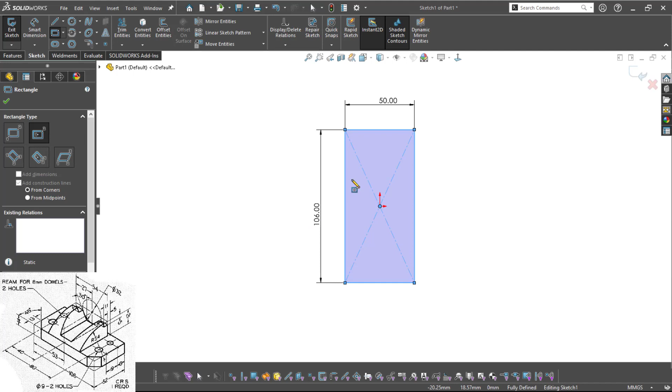I need to reverse these things. Always try to sketch your model in such a way that the orientation and isometric view should be the same as you're looking in the sketch. Apply the chamfers at these corners, you can even change it to angle and distance. This is 13, and these two corners.

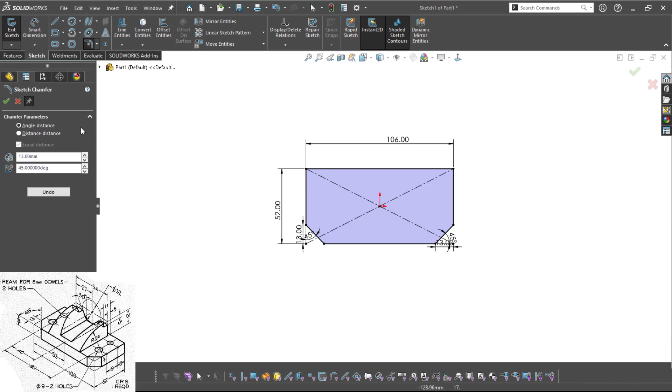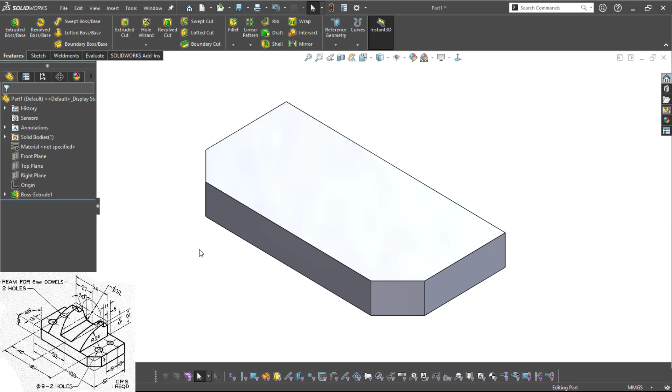Next I need to deal with the top portion, as you could see. So I'll just use the top face, and on this I'll sketch this portion. I'll use the center rectangle again and define the dimension, as you could see it is 54.

The top edges have been referred, so we don't need to define the horizontal distance there. We can use the Instant3D and drag it up to 21 as a shortcut. Once this is done, refer the face and just draw this curvature.

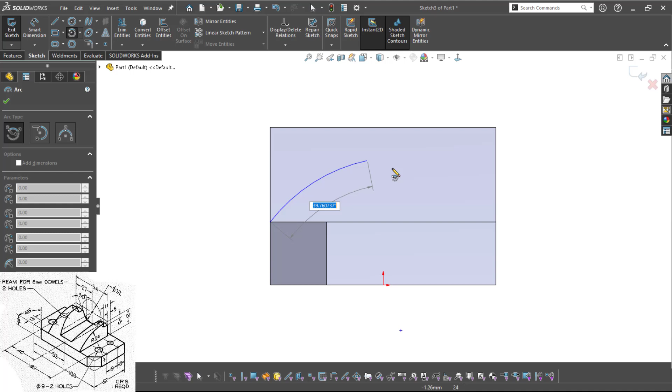I just want to remove the material, right? You can use the center arc. Sometimes it won't work, you need to start from left to right, so then only it will be fine like this. I can drag it, but if I place it like this, it won't work. Let me just try, the radius is 54.

Now it is fully defined, but it cannot assign the tangency. What I can do here is, by just looking at it, it shows it should be tangent. So in this case I'll just remove this coincident relation, and now I'll simply keep it like this and define the tangency relation.

If I define the tangency, I need an extra extended line to just deal with this. So you can use the line tool and draw the required line like this. You can trim the portion which you don't want. This needs to be horizontal, and now the open profile is there.

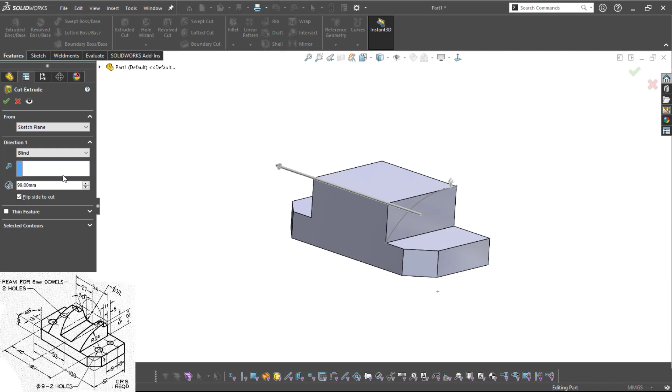You can even use this one to just remove the material. The advanced option in SolidWorks, you can just flip the direction and define the dimension. Choose open profile and cut it. I'll just reduce the size to 70, okay fine, green check.

This you can do it in SolidWorks, it's very easy to deal with this kind of structures, and using the open profiles you can remove the extra material.

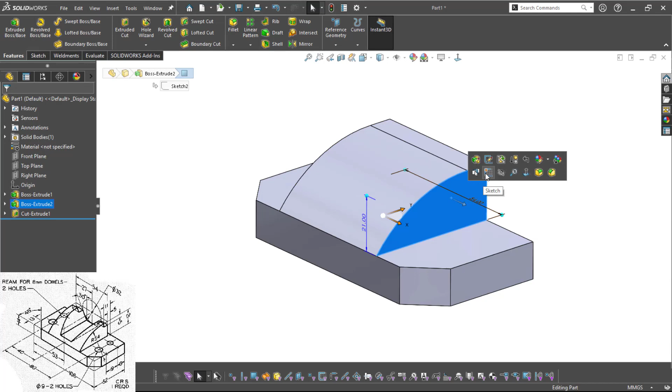And yeah, I need this structure, so you can trim this extra. Now you can give the dimension, that should be 5, this also should be 5. Okay, this is, yeah, 5. From here to here it is 11. As you could see, the sketch is fully defined.

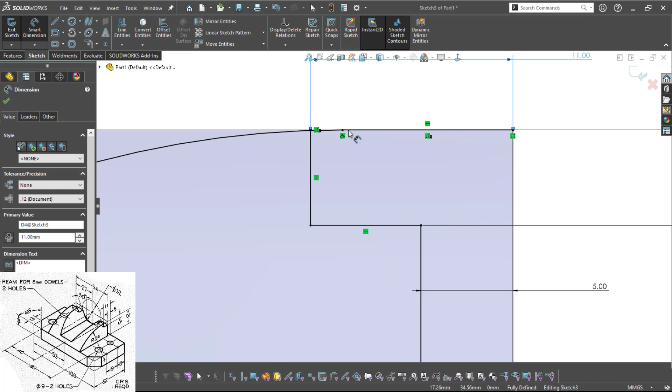I need to remove these extra steps, which are not needed, the small things and this line. Dimension gone, so what you can do is reassign the dimension with respect to the reference edge.

Now you can try it, so it won't work due to the complex geometry.

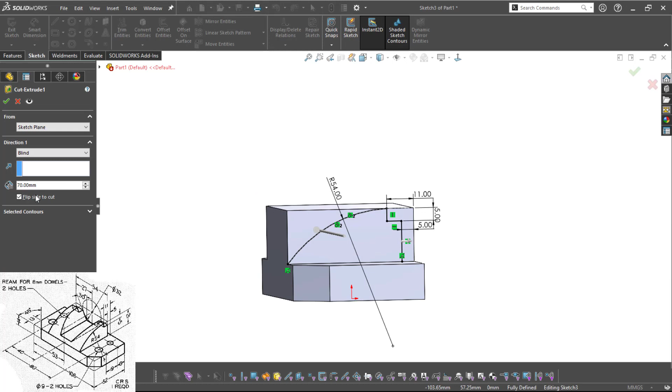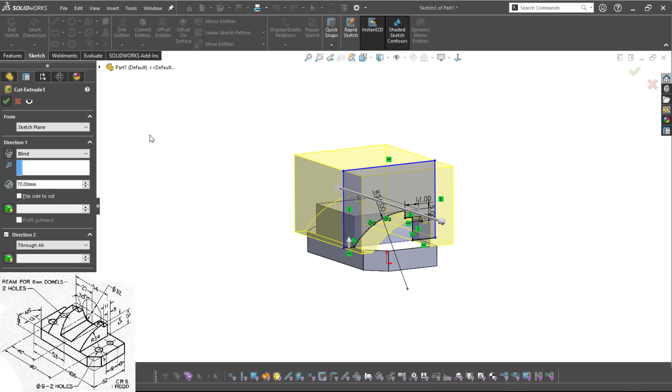So this time I'll use the close sketch. You can simply edit this and close it from the backwards like this. The outside material we don't want anyway, you can do that, so edit the feature and just reverse, flip the cut side. Okay, this is fine.

On the front piece, I'll draw this one. As you could see, the circle is drawn at the center, and it is vertical to the origin, it should not move. All the dimensions are given, the diameter of the circle is 32, and this and this should be tangent. I'll take it at the moment because I can't see the dimension he has mentioned.

Next thing I need to draw the tangent line, so I'll refer this edge and draw a line, making it tangent here. Next I need to create this shape, so I'll specify the angle. This is an advanced technique - select the line and point and define the angle. It is 30.

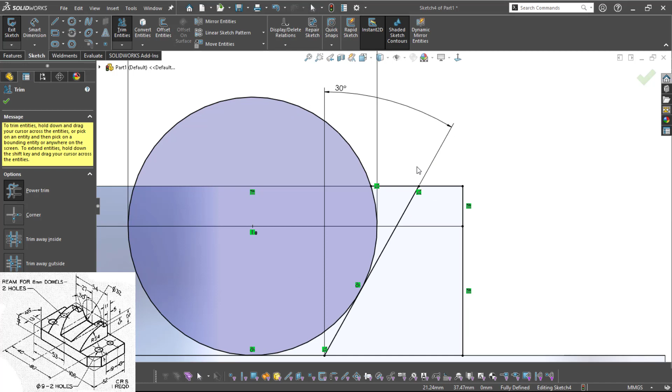Next I need to create the closed sketch here, so I'll use the convert entities tool to save time. Oh, I don't need these. I need a center line to trim the entire circle, so I'll refer it as a construction line.

Mirror entities to mirror these whole things, mirrored about this axis. This is fine. So now here I need a line.

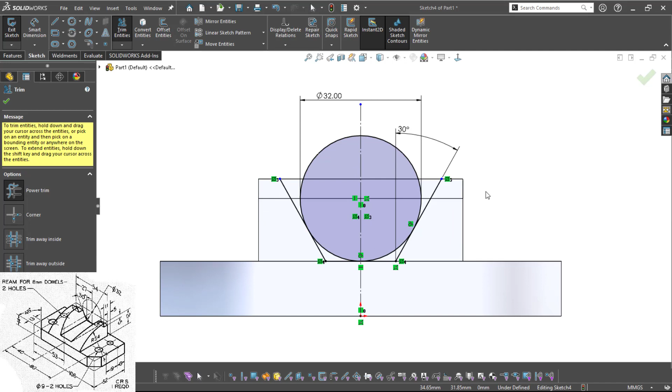I need to close this. I think this extra outside stuff is not needed - only the inside material we need to remove. This is not needed, remove this and the circle, and this. Yeah, I need to have this.

So control Z, and convert this for construction, so it will be referred as construction only. I'll close the sketch using the line tool, now to get the collinear relation done.

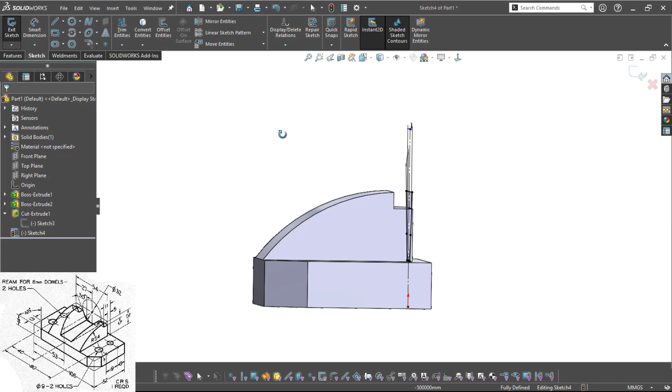Exit the workbench and extrude it - that is cut extrude. You can use the Instant3D, drag it, use the quick access, and cut.

The thing is, as you could see, there is a slight distance I need to give from the bottom edge to the tangency of the circle. To deal with this, from the sketch I'm not able to analyze the dimension from the tangent edge to the bottom rectangular block.

What I'll do is simply analyze it as 5 mm at the moment, and let's see how it's going to help us deal with this particular scenario.

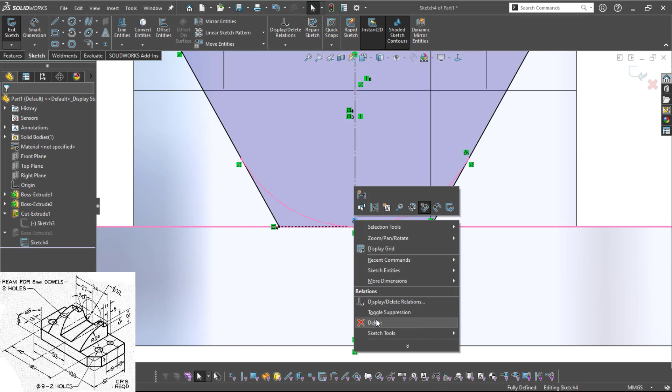So what you can do is simply edit this particular sketch. Here I need to move this one up, so I don't want to delete everything. What I can do is remove the tangents, and this I can't move. I can remove this corner coincident relation.

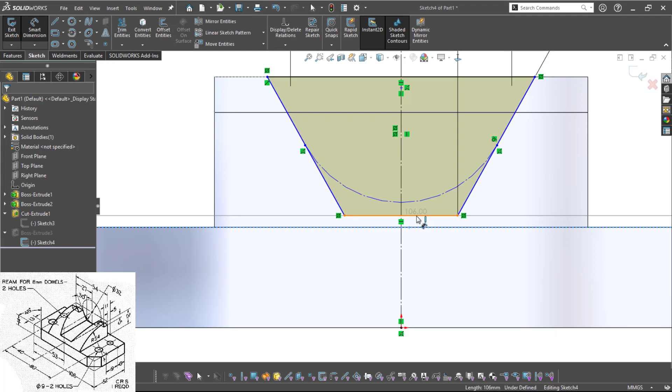This one, yeah, if I remove this I can move it up. Now from here to here it should be 5 for me, and this circle should be tangent to fully define the sketch - this line and this curve tangent. Yeah, this is fine, this looks pretty nice and it is appropriate. I believe there might be a dimension lag.

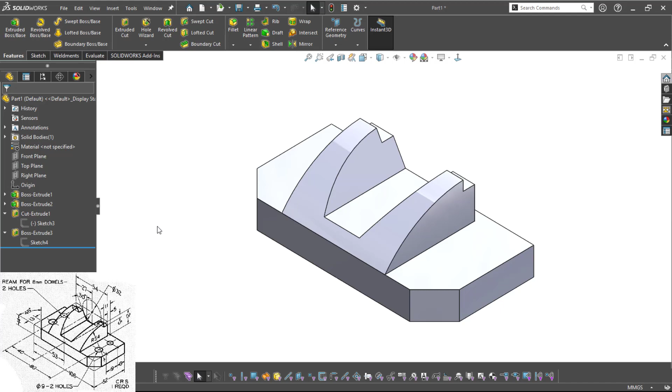Okay, the next step is to just add these holes. You can use the extruded cut to deal with this, so I'll refer the top face as a reference and simply draw the sketch.

The diameter for the holes is one is 8 and one is 9. I'll refer the center axis as construction, and I'll use the dynamic mirror, so whatever I draw on one side will automatically reflect to the other side. So it should be 8, and this is to be 9.

I'll just give the dimension, so from here to here it is 80. One side is 40, so as it is symmetry it might take - let's see.

So this is vertical, so it should not move. So from this point to this edge it is 13. Yeah, from this point to this point it is 19.

Yeah, done. So I use the Instant3D tool and simply do the same thing, you can use the cut extrude. Yep, that's all about this here in SolidWorks. So what I'll do is I'll use Catia now.

Mechanical, from there select the part and you can name it here as well - locating finger, the part name. Just click on OK to access the workbench.

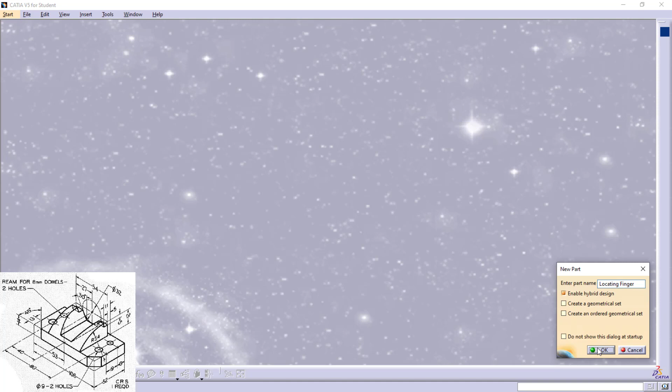Now you can use the standard planes. I need the top plane because I need to draw the block at the bottom, so I need to select the sketch. Once you click on sketch you can access the rectangles, the profile - if you use the profile you can even draw it like this.

So the snap is active, so you can just turn it off by using the snap option. Let me just showcase the same thing. I'll draw this - yeah, instead of the profile, it is taking too much time, I'll simply draw the rectangle.

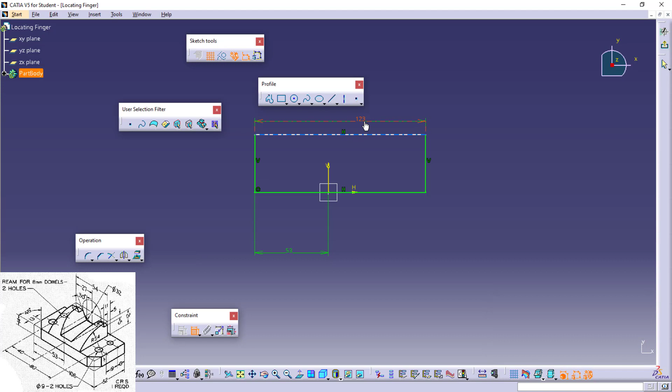I'll define the half distance, it is 106 by 2. Can mention the same thing - sorry, straight 106 by 2. This should be 106 total, and this distance should be 53 as mentioned.

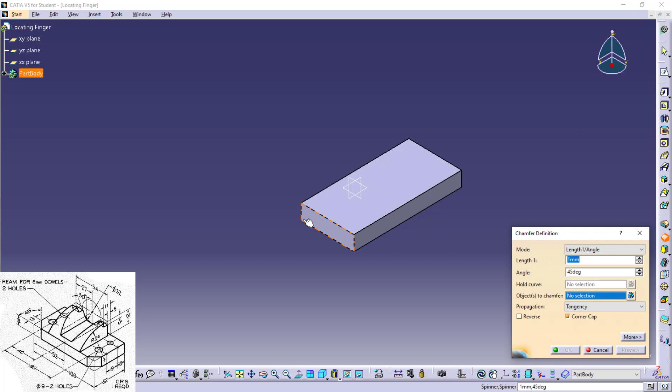Okay, once you're done with this, simply extrude it up to 14 mm. Once that is done, you can align it to isometric view. The flat chamfer I need here, this edge 45 is already taken, so length and angle, 13 the distance. You can use the preview as you could see and just simply click on OK.

So next thing I need to just create the top portion. Just select the face and drag it down.

On this, you can use the rectangle first. You can't refer the edges here, so I'll turn off the snapping.

So this is the kind of rectangle. What I'll do is I'll simply use this one and this one, hold the control and use the constraints, and define it as coincident.

Now dimension, so you can activate the constraint that is already defined. This edge to this edge, it is 54.

Still it is undefined. I need to define the center distance. So what I'll do is... cannot find the constraint here. No midpoint axis. Can't do it like this.

So what I'll do is I'll use the dimension only. It is 54 by 2, right? Can do that. From here to here it is 54 by 2. The dimension.

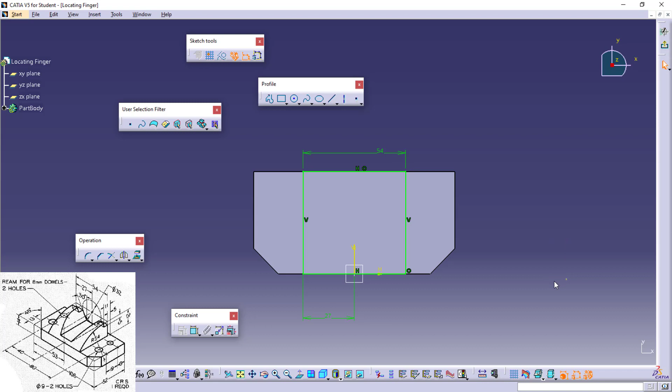So I need to extrude it up to 21. You can just drag the tools and customize it wherever you want. So I can do it. Hold the shift to just align it properly like this. Extrude it to 21.

This is done. Select this face, sketch. Can even drag that sketch and place it here. Middle cursor button drag to move.

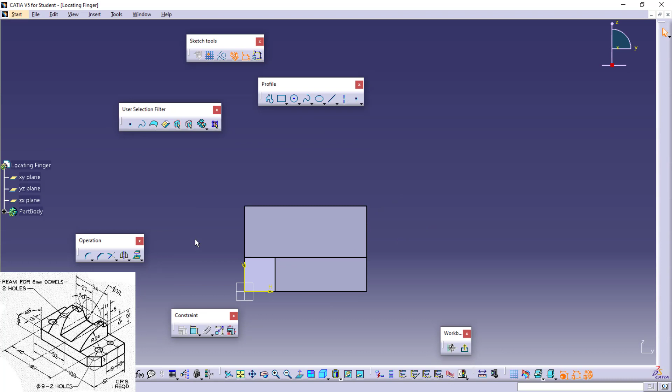Now I need to draw the same thing. You can use the center arc. Draw it however you want.

Now this point and this edge should be coincident. Activate this tool and make it coincident. There are many ways to deal with this, some shortcuts I'll explain later. So point and edge can't be... yeah, it is possible coincident. Click on it.

Now I need to define the dimension. The tangency is fine. Anyway, I need to define that.

First, I'll draw the rough sketch of this reference, like this it is. I'll draw a complete profile like this.

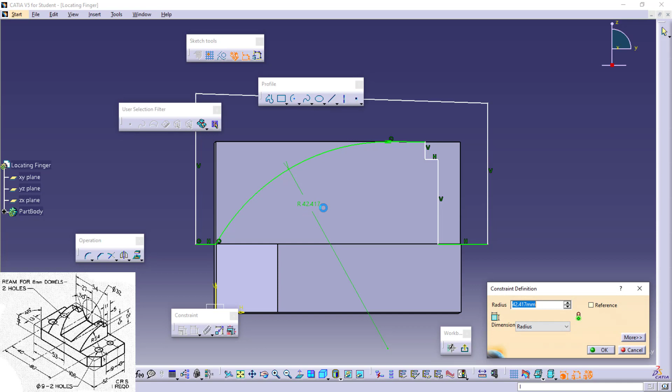Our dimension, this should be, as I said, it is 3, 4, 5, and this is 5, 11.

But the thing is, as you could see, I need to trim this. Can't drag it because due to this coincident relation, I'll just delete this. Again, drag it now this side. But this line is not needed.

What I can do is, you can drag it like this, delete this, and now you can use the trim. Erase tool is there. Just select that, remove it. This I don't want, and this, yeah.

It is still undefined. So anyway, the dimension is there to point to that line. What I can do is use that dimension point and the edge coincident. Okay, still it is undefined. So I'll define the dimension again. Let's see.

So use this line, from here to here it is 5. Okay, this dimension is not needed.

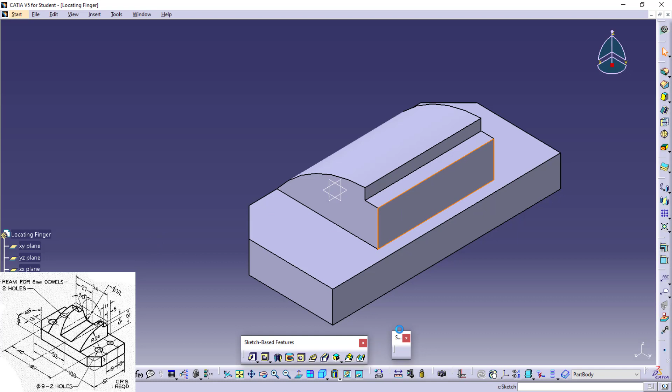This time I shouldn't make that mistake, so it shouldn't be tangent to the bottom edge, right? It should be at a certain gap. I'll keep it like this. Instead of using the line, you can use the profile.

Here it should be like this. From here to here it is 5.

Right, and next thing is, yeah, these two should be coincident. Just select this edge and define coincident. Shortcut it is. By using the dimension tool also, I can do the same thing.

So I need to assign the dimension here. I'll use this vertical axis as a reference and it is 30.

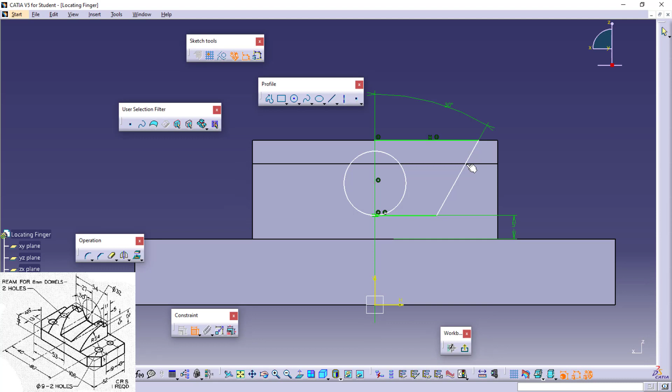This and this should be tangent. Select these two, right click and tangent. Fine. Still it is undefined.

The diameter I need to define, right? It is 32. Here, this is fully defined. Iso-constrained it is in CATIA.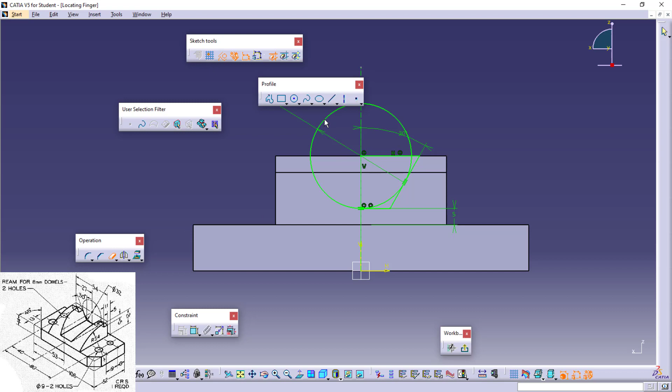So I need a reference construction line to mirror it. I can even refer the vertical line. I'll trim. Okay, for trimming I need it. Yeah, so this is fine.

Now I'll select this line and I'll simply click on this construction to turn it for construction geometry. Select all, use the mirror tool, so you can see all the tools are available. So I need the mirror, select it and select the axis. This is done.

Simply use the pocket tool here and preview. Fine. Yep, finally I need to create the two holes on this face.

Simply select the face and sketch on it. Same thing, the front one should be of 8 mm and the backward hole should be of 9 mm.

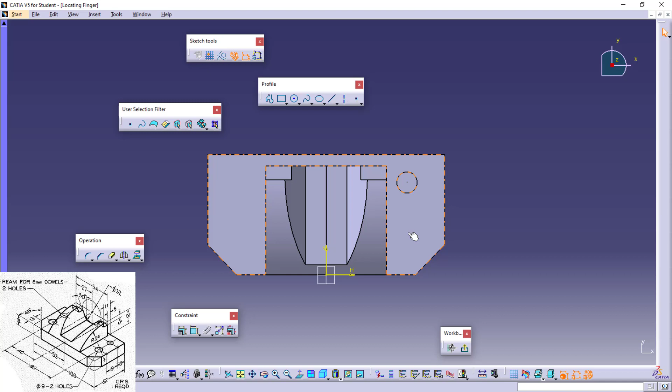You need to double click any of the tools to reuse it multiple times. A single click will help you to use it only one time. Double click will help you to use it multiple times, like this.

It is still active. So this dimension should be 19. As I said, from here to here it is 13, and from the origin it is 40. Total is 80, right? No, 53 is not the case. Let me see. Yeah, it is 40.

Diameter I need to define. It is 8, there should be 9. But still it is okay. It is moving.

You can't use vertical, so there is no option if I make it. So what I'll do is I'll simply draw a line from here to here. I'll make that line vertical, using the constraint definition vertical. Can make it construction now. Yeah, this is done.

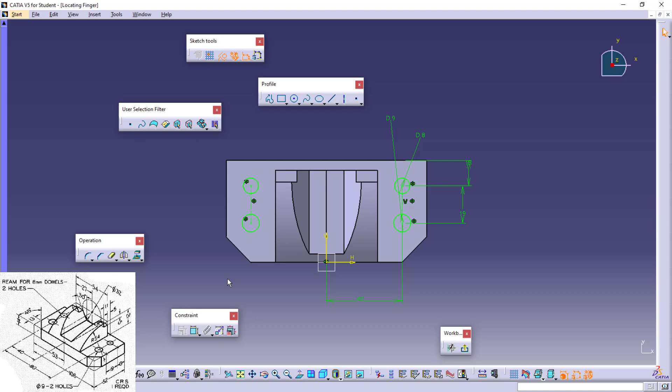Mirror it with the vertical axis. Exit the workbench and use the pocket tool to just remove the material. Preview and okay. Yep, this is on Catia.

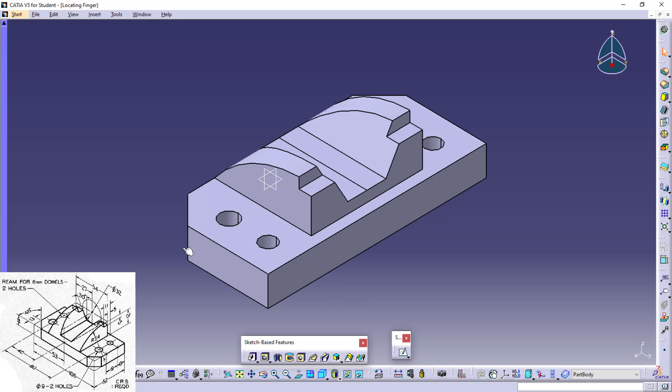Now we'll switch to another software. I'll use Unigraphics now. Okay, NX CAD, so here I'll deal with the model.

So you could see, depending upon the workbench, you have multiple options. I'll use the model and the part. Units as millimeters.

Now you can use the sketch and select the planes. Okay, I need the XY plane. It is Z downwards, no issues. Here the plane selection and orientation is a bit difficult, no issues for that. Okay, you can just simply right click, hold and drag to make it normal to view. Remember that.

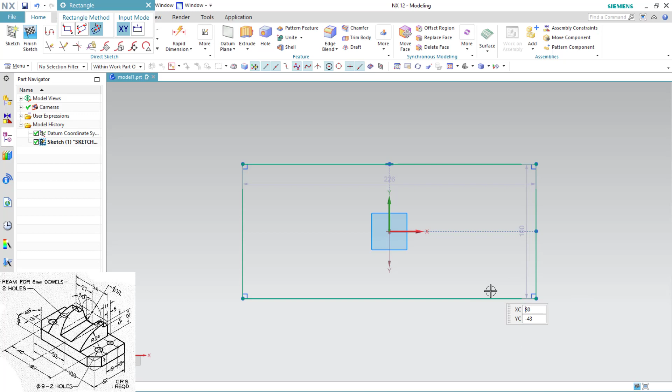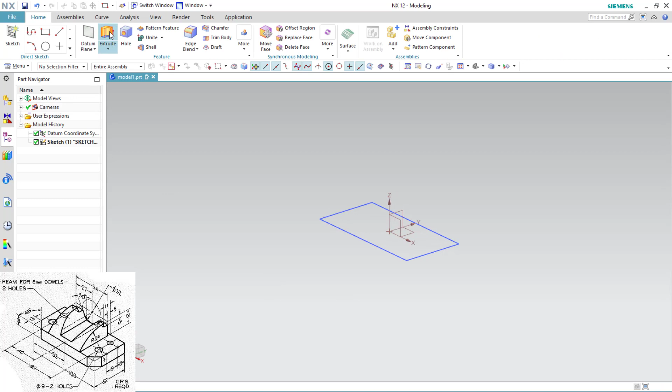Done. Can finish this and extrude it, just select the sketch. Here it is inferred, okay, I need to define the value. It is 14. As you could see, there is no reverse option in this, so I just need to define the minus value. So what I'll do is simply enter minus 14 here to reverse the direction.

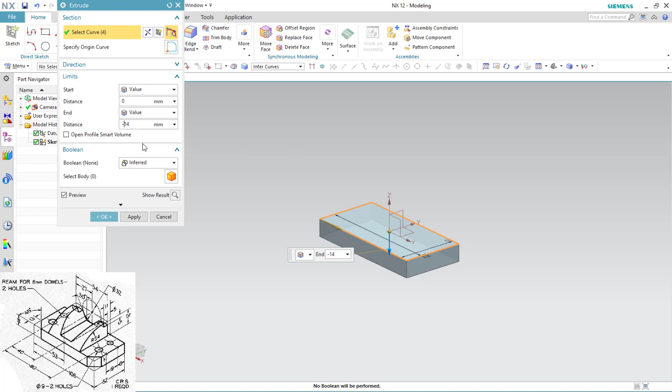This is fine, green check. Okay, now I need to select the plane to sketch it. Before that, the chamfer 13 and angle I need to define, so it is symmetry here. I need to change it to opposite angle, right? Done, yeah.

Now I need to sketch on the top face, so here it is quite difficult. Just selecting the face and sketch will not help you work on the workbench. You need to define a certain point, origin and a plane here, so it is quite difficult in this. So what you can do is refer the center point and the origin. Click on OK, this only you can do it, or else automatically it will snap.

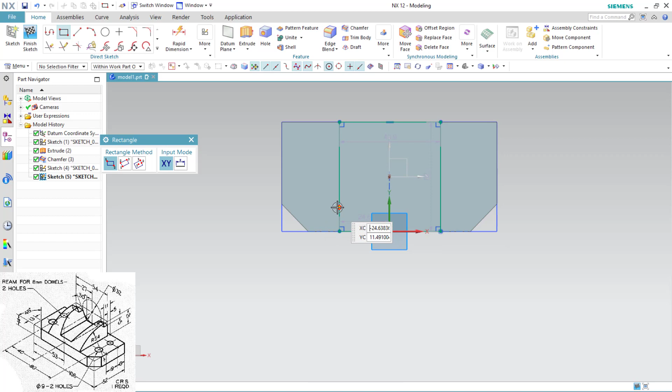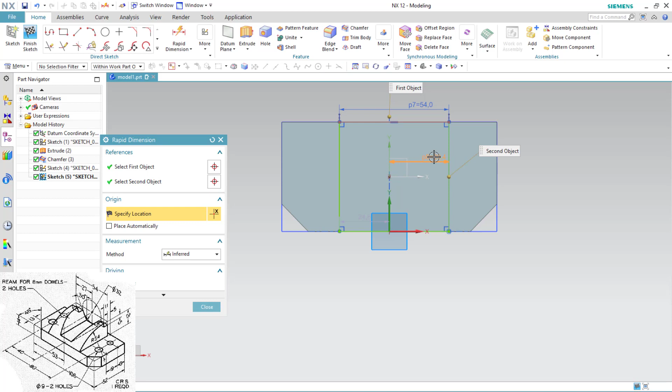I need the corner rectangle, like this. Now dimensions are already defined. Here continuous auto dimension is active, you can just turn it off whenever you are trying to deal with this. Okay, the rapid dimension, so this dimension should be 54. Yep, so this is okay. So from here to here it is 54 by 2. Can enter the values only because we are weak in maths.

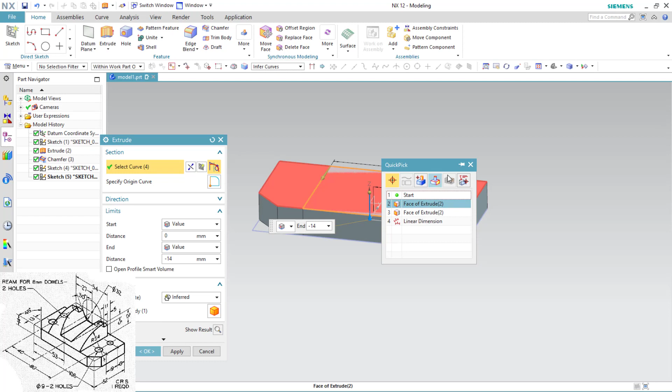27 it is. Finish it and extrude it up to 21. Select the sketch. Oh, okay, and cancel it and redo it. Just select the sketch first and extrude. You can see the direction now. It should be -14, no, so okay, that was the show 21. Click on OK, that is done.

So I need to create that sketch, the curve sketch here. Again, it is quite difficult, so just select the sketch. But this face, okay, that corner is taken into account just for a reference. Remember that. Okay, origin is there on this particular sketch now.

Well, I'll draw this circle. Can refer the origin and simply drag it up like this. Auto dimensioning is active, you can use the move and you can turn it off, continuous auto dimensioning. Okay, now I need to draw the rough sketch. You can use the profile instead of this. Z is the shortcut.

Okay, this is fine. I'll extend it out, drag it like this. Hold it and drag it, okay, up to center.

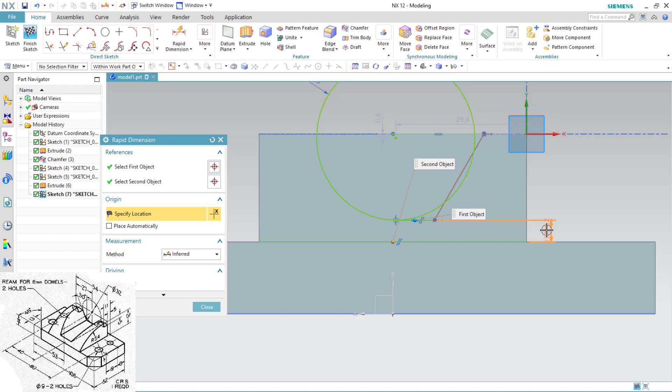Now I need to define the dimensions. Here for dimension it is D, okay, that's the shortcut. So the diameter is, as I said, 32. Now I'll drag it up. Escape, and now again you can select the rapid dimension. Shortcut is D, value is 5.

Okay, now I need to apply the tangent relation for this. So the curve, hold the control and select these, the tangency, like this.

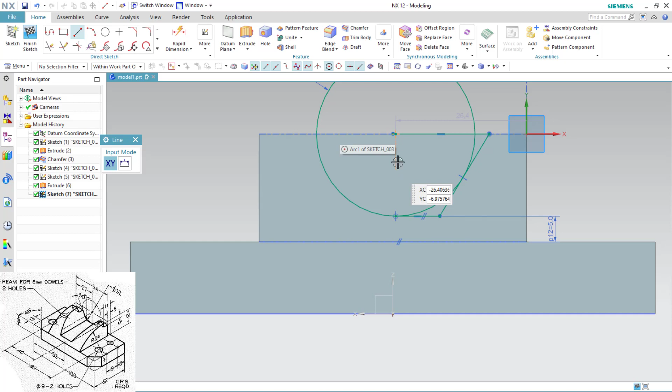That is done, I need the axis to mirror. I'll simply create the line and make it a reference axis, just click on it. You have the option convert to reference. Okay, this I'll delete it, just select it and delete.

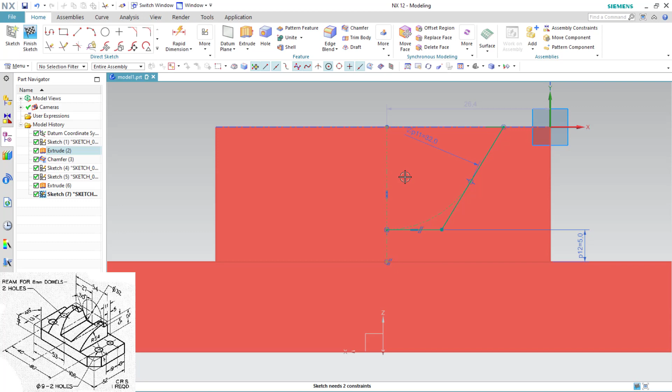And now I need to turn it to construction, that arc as well. That is done. Use the mirror tool, this side, refer this.

Now close the sketch. At the top it is open, as you could see. So you can use the line tool as well as profile, or else you can use the geometry constraints. Select these 2 points and define coincident.

Yep, it is closed. We can exit the workbench and extrude it. I think everything is fine now.

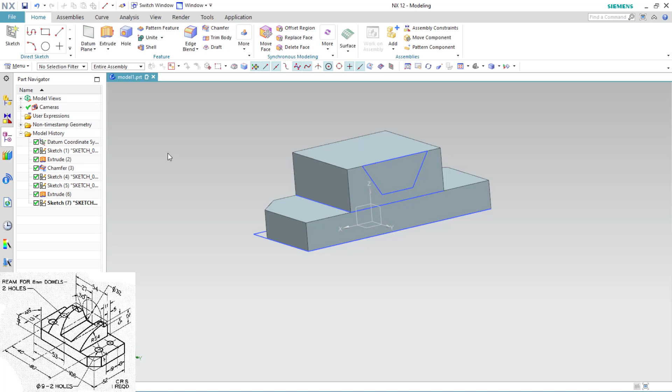So now here you don't have the extrude cut option as we had in other software, like SolidWorks and Catia, but in NX it is combined with the same option. Select the sketch, and in the Boolean operations, you need to just change it from unite to subtract, and there are other options.

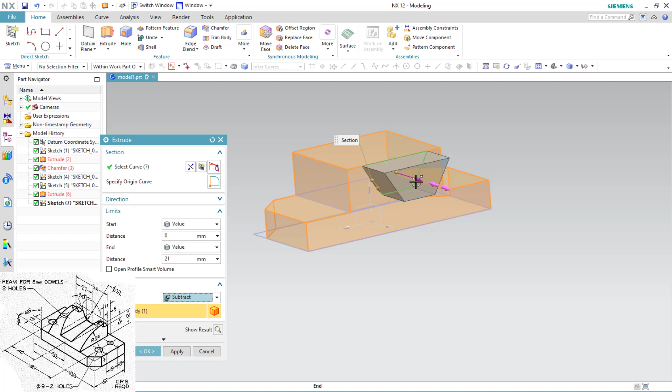You can use the 3D bar to drag it up to remove the material as well, like this. You can use the show preview, and you can simply hit OK or apply, both are the same. Now I need to refer this face, click OK, and here you need to draw the same arc.

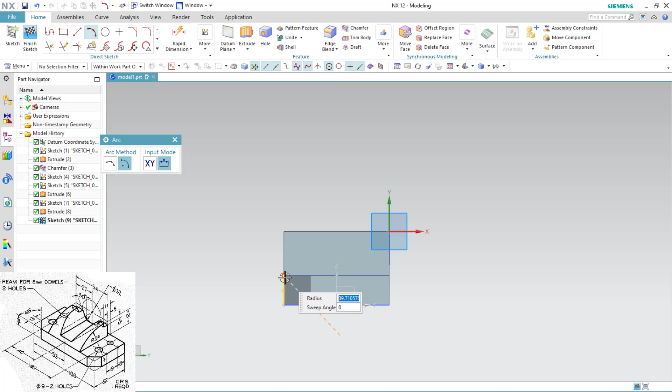I don't need the circle, so you can use the center arc, like this. Now dimension is 54 radius. What I'll do is I'll draw a line at the top now, because I need to define the tangent.

See, you can't select this and this point as a reference. Quite difficult. The edge is not selectable here.

So to deal with this, I'll draw a line first like this, and I'll use the geometrical constraints and select tangent - see, this line and this tangent. You can drag and extend it like this and use delete segment or trim, power trim. This will help you to remove the material like this.

Sorry, the sketch. Now I need to draw the rough profile like this, the cutout one. Okay, dimensioning. D is the shortcut. So I'm closing it. Fine.

From here to here it is 5. It is 11. This is already taken, I don't need to define it again. So control Z is fine.

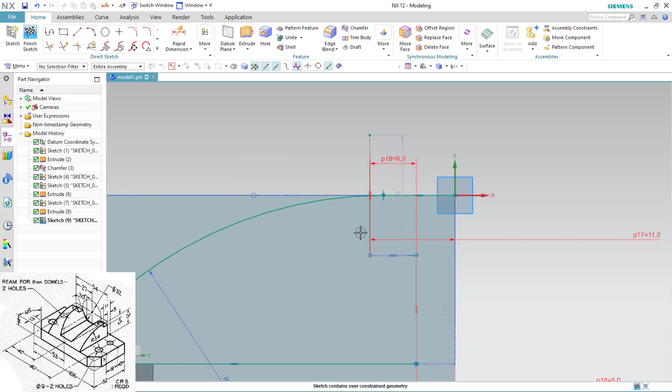Yep, I need to trim. Okay, this dimension is remaining. No, sorry, it is 5.

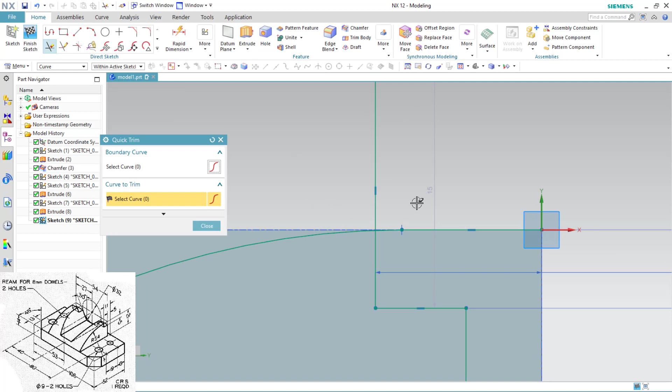Okay, now you can delete the remaining extra segments, and activate the power trim. Then you can use the same as we do in SolidWorks. You can simply click. Yep, so now.

Yep, I need to just draw the closed profile outside to remove the external material. Trim this, can use T as the shortcut. Okay.

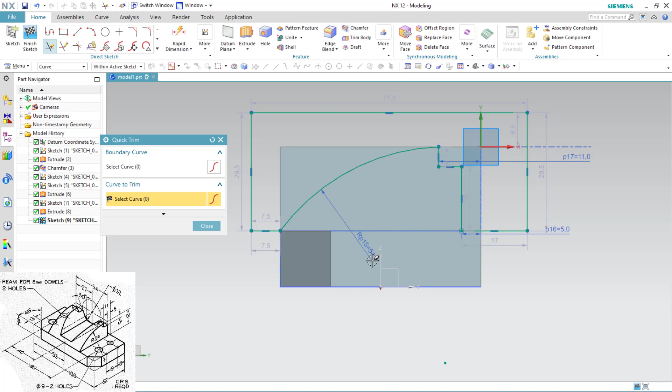Just use the extrude and drag the side - subtract is already active. Preview and apply. Okay, yeah, so the sketches are already there in blue, so you can just hide them.

As you could see in the tree also, it is getting hidden, right? From here also you can do the same thing. If you uncheck this, it will suppress the features, remember that. I'll hide all the sketches.

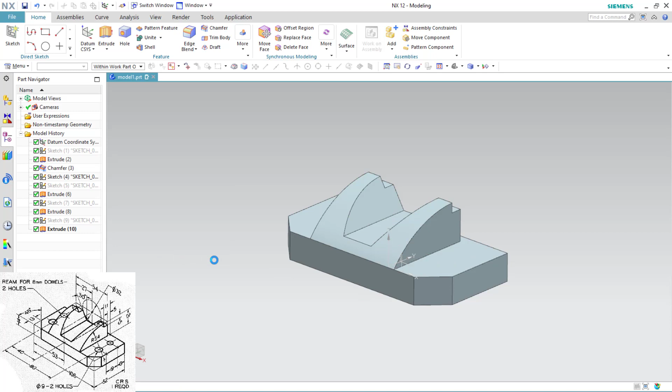Okay, now finally I just need to create the holes, the cutout. You can use the hole tool, but it is taking too much time, so leave it like this. Instead of creating the planes, you can refer the datum planes, that is coordinate system. Datum CSYS - what it will do is automatically create the plane, and you can refer that one as the reference.

The easiest way to deal with that is normal to face and working off the faces. Remember that you need to just deal with the coordinate systems. So here I'll just turn off the auto dimensioning, and I'll define the value. It is 8 and 9.

Dimension D is the shortcut. From here to here it is 19. And from this edge to this, 13.

Yup, from here to this origin it is 40. Right? Yeah, total 80, in the sense it is 40. Green.

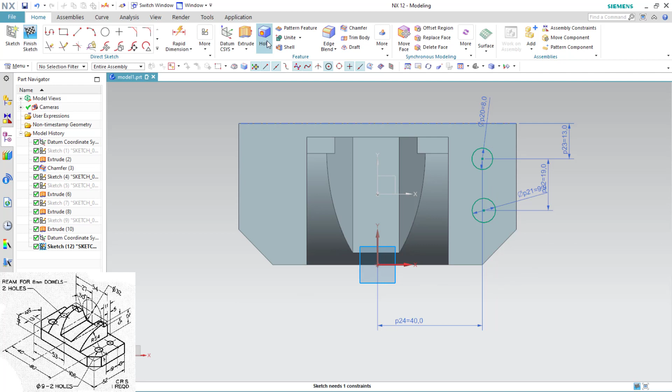I need to mirror it. Instead of that, I'll simply use subtract first and you can later on mirror it - that is also one option. So you can use the mirror features tool.

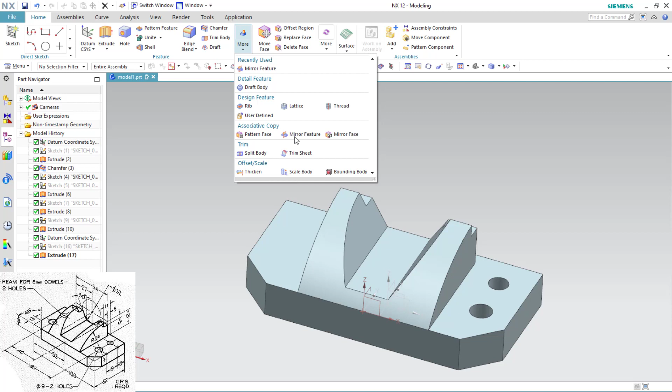And here this, and the reference plane is this. I have to click on the plane first. Yeah, this C plane, show results, apply. Okay, this is how you need to deal with NX.

Here you can use the default orientation. It is standard orientation, it is written, so it is quite confusing here. No issues, these are the different views, standard views.

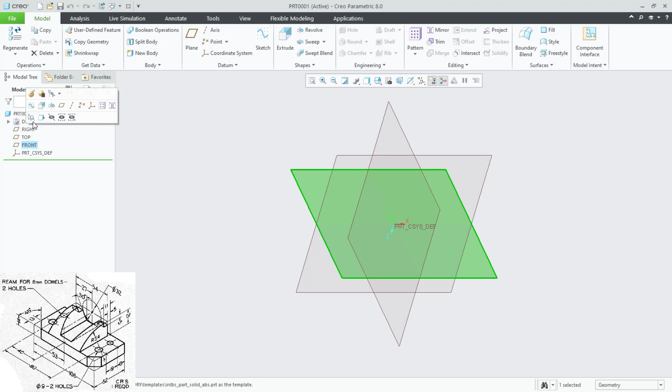From this, it is quite difficult. So let me just deal with the front plane. I'll draw the center rectangle.

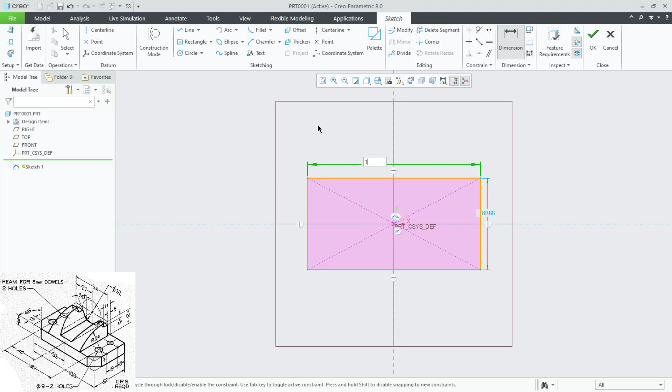To come out of this, you need to press the middle mouse button. Remember that, so then the software will automatically assign the dimension. You just need to change them. So it is 106 and it is 52.

This is fine, exit. Use the extrude, same thing as we did in NX. It is 40, both are same here. You need to use the same tool to remove the material as well.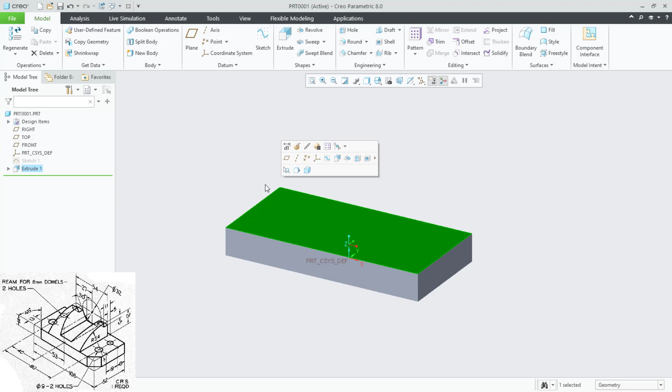So I'll turn off the planes, datum planes. This face, on this face, sketch. This is the easiest way here. You can select the face and sketch. Automatically it will take the reference origin. So again I need a rectangle.

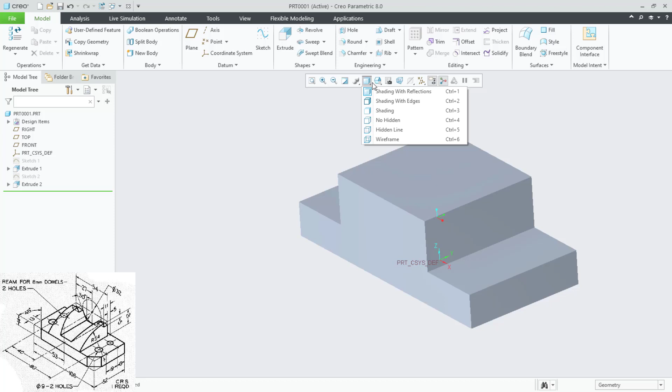So in the settings you could say it is there, the remove material. Now I'll activate the shaded edges. Instead of this is fine with shaded with the edges. This looks cute. On this face I'll draw the curved portion.

Same thing, I'll use the center arc, not from there. Here I'll draw it like this. Middle cursor button, so radius should be, let me just drag it first. Like this you can orient it because the dimensions are movable. Once you define the dimension, it is locked.

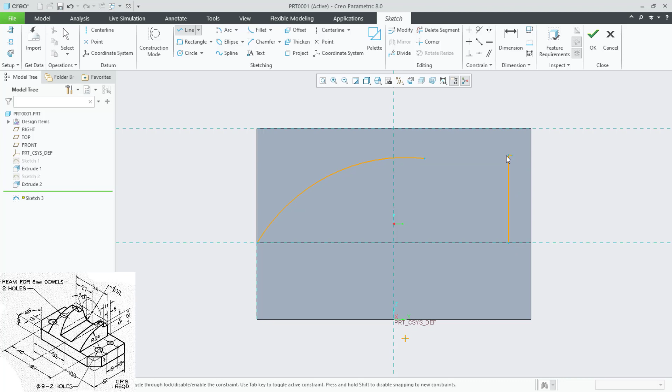I made settings, you can refer my YouTube video. So I'll draw the rough sketch like this, and you can just select the tangency first, or you can hold the control and do the same thing, and you have the tangency. Or else you select the tangency first and select these two, so automatically it will take both the same.

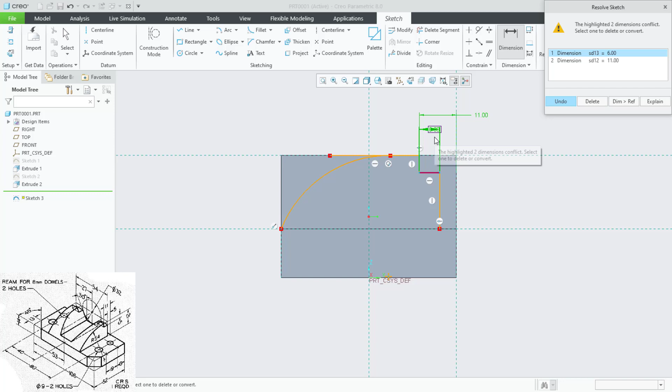Dimension, you need to select and click on the middle cursor button to activate the dimensions. Same thing this side, it is 11. That is not needed. So this dimension is needed. Select the edge and middle cursor button. Wherever you want, just click on it. Done, so you need to trim.

Delete segment will work. Okay, but still there is... okay, I'll close the sketch.

Yeah, this should be changed. Okay, it is 54. Now I need to delete these segments. So I was confused, so why does it look like this? Now it is fine. This also I need to remove. Yep, this is done.

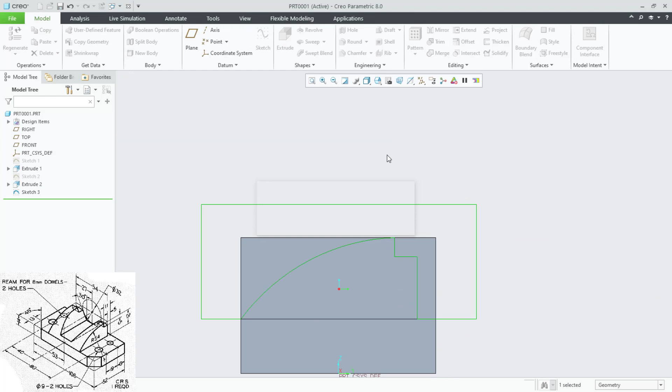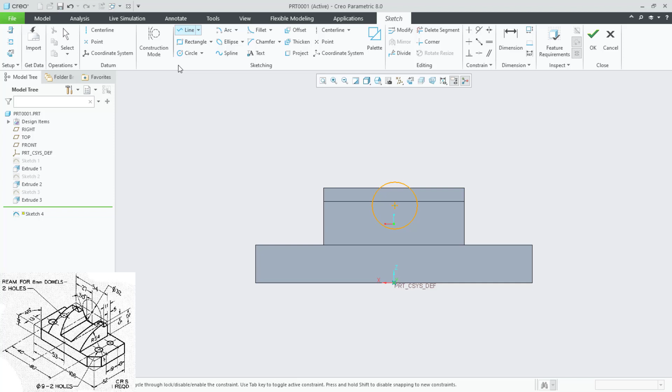On this face, I'll sketch this. As you could see, exactly the center it took the reference, no? Yeah, the circle I need, and then the profile, like this.

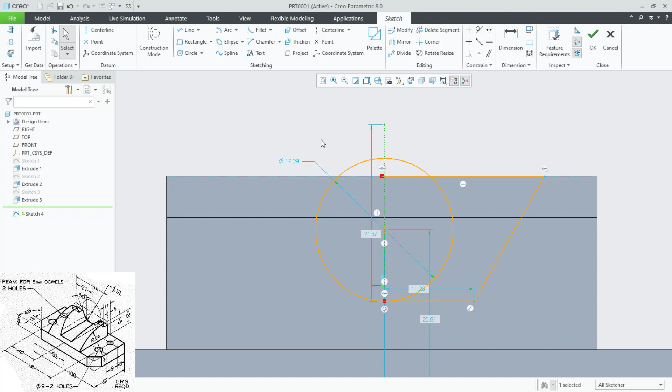I'll draw a reference axis, and click on it, I'll make it for construction. You can use this quick access tool. Delete segment, remove this, this, and this.

Okay, I need to define the tangency first. Select the tangency, define these two. We can delete the segment, the top one, and this curve should be for construction. Yeah, that is also not needed.

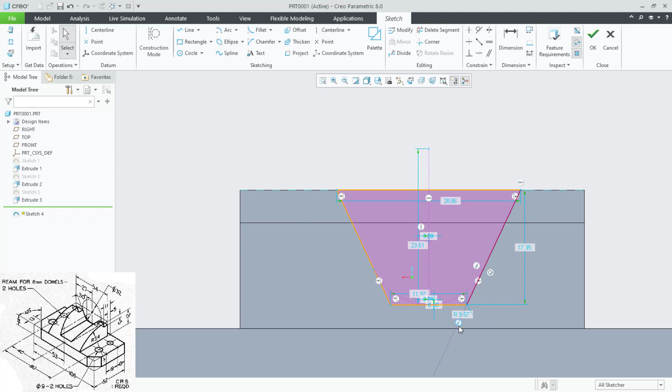Done, now I need to mirror this. Select the whole thing, we can use the mirror tool and the axis as a reference, but still there is something wrong. Okay, the axis should be exactly at the origin that I need to refer, and this value, it is the radius value I need to find.

Yes, it is 32, diameter is 32, and this radius is 16. Fine. Yep, this and this should be midpoint. This is fine. There should be 5. Done.

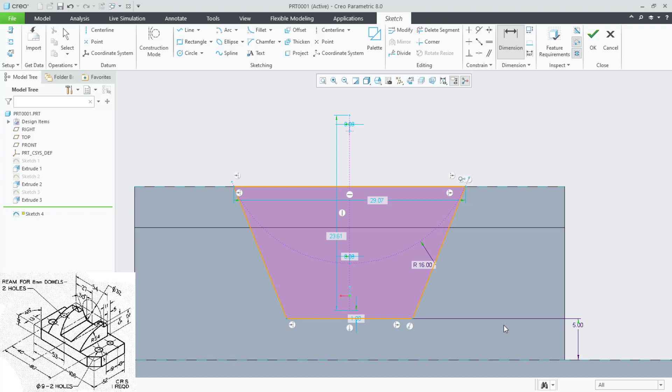Sketch is fine, so we can exit the workbench and simply use the extruded bar feature for this.

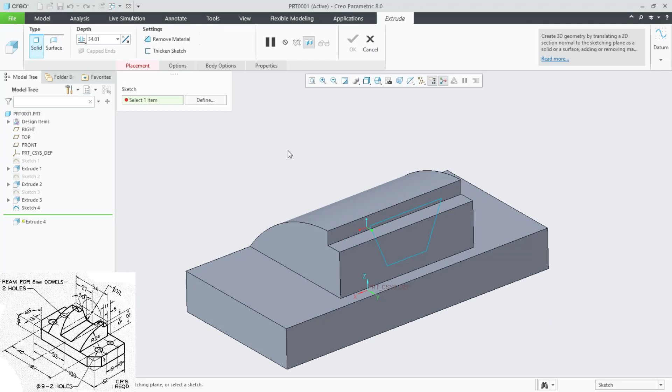Control and shift drag will help you to just move and pan your model, remember that. Remove, reverse the direction. Select the sketch and drag it like this. Done.

I need to apply the fillet later, I'll do it. I'll first create the holes. Circle tool. Here one, here one. Just middle cursor button will pop up the dimensions automatically, 8 and 9.

Remaining I'll assign by myself by using the dimension tool. So whatever dimensions are predefined, they will go off. Okay, 13, there should be 19. Once I enter this value, the remaining will go 40.

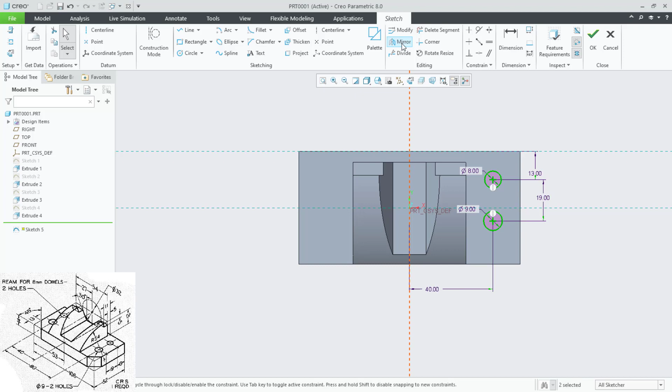Okay, so I need to mirror these. Select these two. Mirror axis. Done. Just remove the material, reverse the direction, apply.

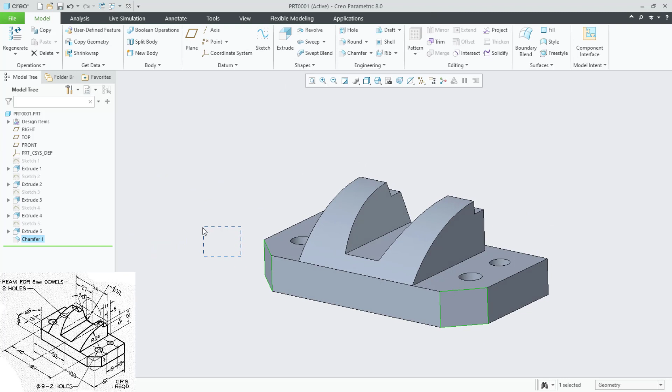It should be dimension and angle, so it is D x D. Change it to angle and dimension 30. Yeah, these two green track done. Yep, the sketch is ready. The complete model is ready. So that's all.